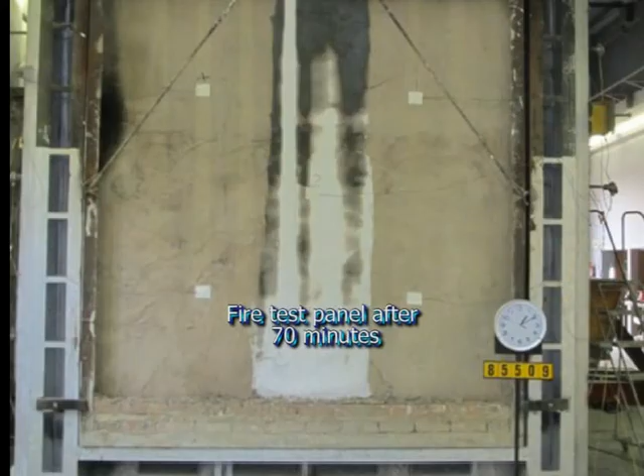Over several years, I arranged various tests to satisfy the requirements of the NHBRC, which are structural performance, impact test, chisel test, water penetration, condensation, thermal performance, durability, acoustics, and fire testing. The fire test done by the SABS doubled the required resistance of 30 minutes.

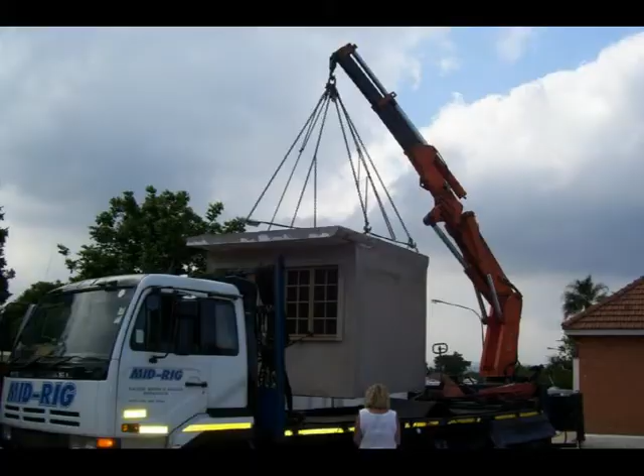Several years later, I used the system to construct an office for myself on our property. This was done at the builder's yard and transported by crane truck and erected on my site on a compacted platform. Polystyrene components which are extracted from the structural drawing onto an order form are manufactured and marked at the factory and delivered onto the site.

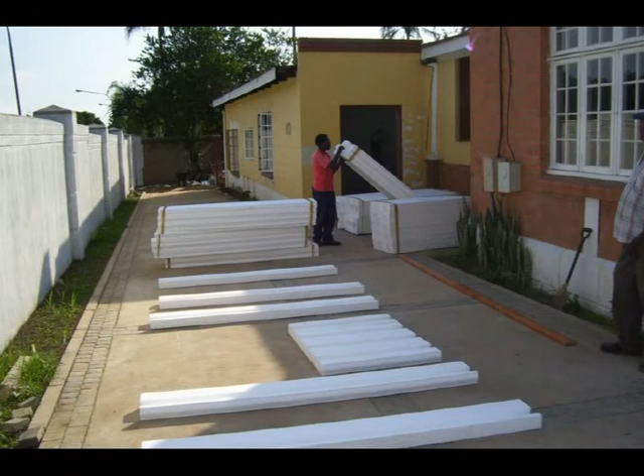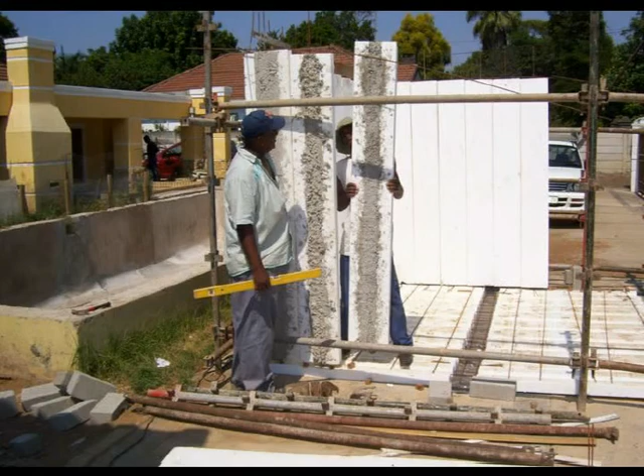The wall and roof panels are placed on a reasonably level area on site. Reinforcement is placed in the rib formers and the ribs are concreted. Wall panels are erected in sequence together with the door and window frames and are braced at the top. The internal and external faces of the wall are plastered with a ferro-cement mix.

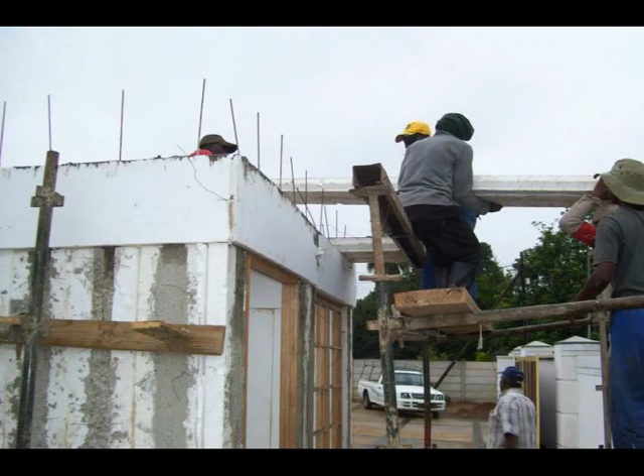Where a poly roof slab is specified, the roof panels are erected on a temporary support line. And polystyrene coping may be specified, which creates a feature and is also used as a stop end to the topping. The walls of polystructures can be of any shape on plan, allowing for architectural creativity. Low-income residential units can incorporate bunks accessed by a ladder for the children of a family by raising the ceiling, thus increasing occupancy at little extra cost.

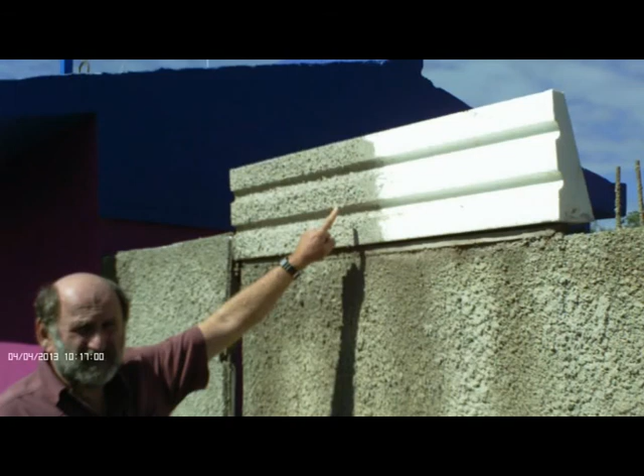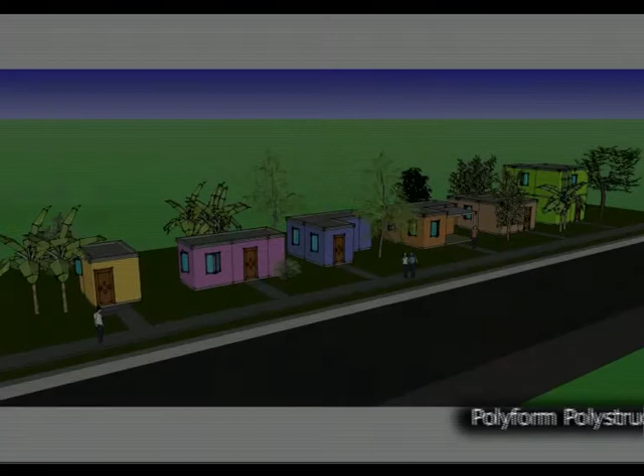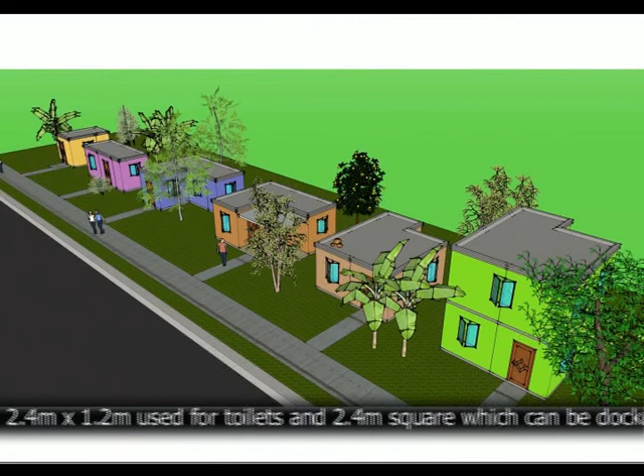By incorporating a deep polystyrene coping surrounding the poly roofs, these can be used for water storage, which is particularly useful in rural communities. The slab is specially waterproofed, and an outlet pipe with a tap provides water for washing or watering the garden. Where sheeted or tiled roofs are specified, wire ties are built into the top of the wall panels, which are fixed to the wall plates.

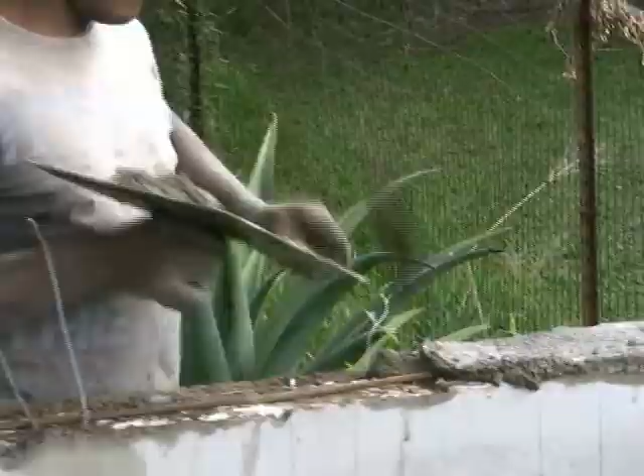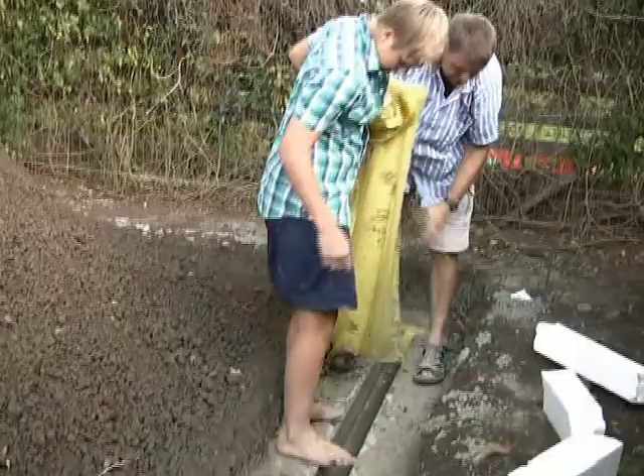On-site construction of polystructures uses smaller, conventional concrete footings into the top of which polystyrene slot formers are cast. These are removed and the bottom ends of the wall panels are placed vertically into the slots. Andy Hull of Polyform has done research into the comfort level of polystructures.

Research conducted into the thermal performance of polystructures revealed that a polystructure is able to insulate heat 40% better than a similar structure constructed out of M140 blocks with a steel sheeted roof. This results in far more comfortable living conditions which maintain warmth in winter and stay cool in summer. Further investigation revealed that in most cases, natural ventilation incorporating air bricks will be sufficient for typical smaller structures, thus removing the need for an air conditioner.

Polystructures not only satisfy the requirements of the NHBRC and are earthquake and storm resistant, but are also extremely cost effective. Hi Andy, tell me a bit about your business. Well, I'm a quantity surveyor, but my background has been largely with a contracting company. My experience has been more on a hands-on practical approach. I've done a fair amount of time with the professional offices as well, but largely contracting.

Now, what about our polystructures? How do our walls, the poly walls, compare with brick and block construction? Okay, what we did there was we took a scenario where we measured a particular structure. Firstly, we measured it as though it was a brick wall, a 230 brick wall, and then we measured the polystructure format.

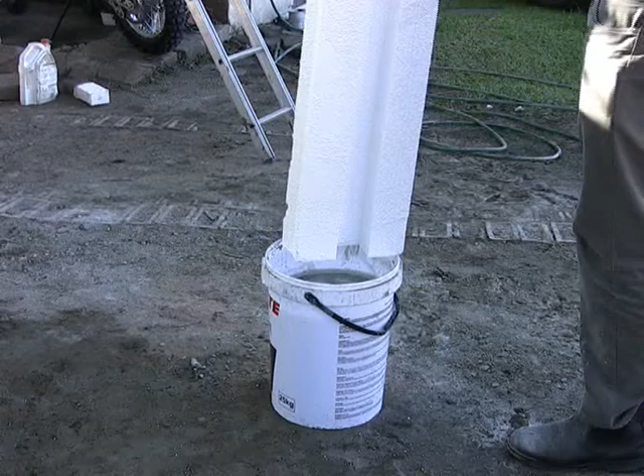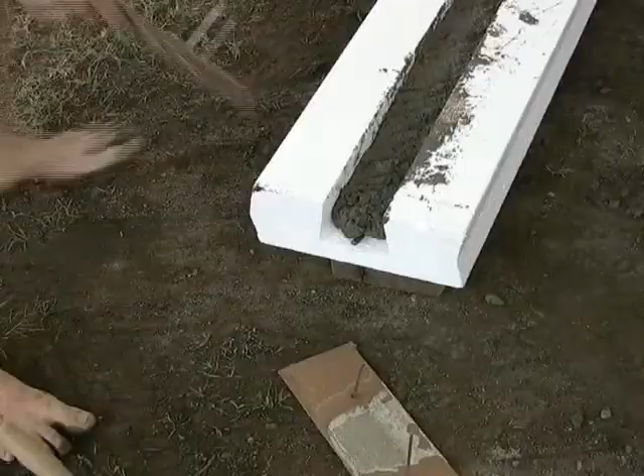Let me tell you a little secret. I'm not a handyman. Out of that have grown most of my inventions. I always look for methods and systems that are easy to construct, which can be done by unskilled workers. And yet in this simplicity is also cost effectiveness.

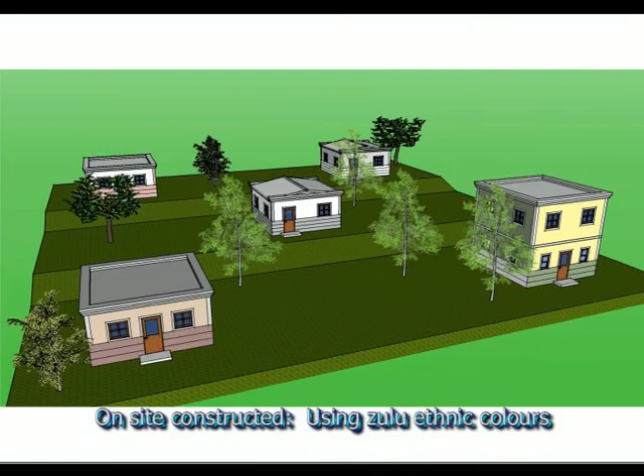An even more cost-effective housing system is the Poly A-frame. For internal partitions, Polyform offers an extremely simple, cost-effective and sound-resistant alternative to drywall partitioning. 500mm wide by 50mm thick recycled polystyrene panels are used, with 40mm gaps between them.

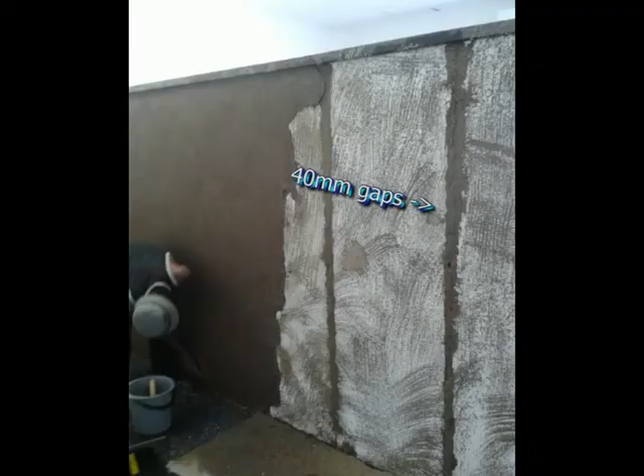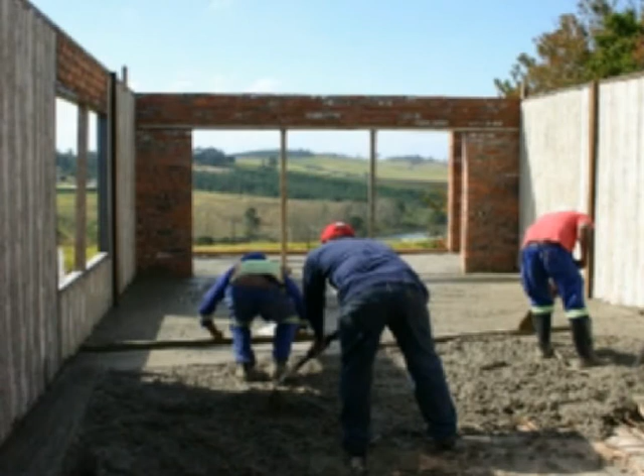The gaps are filled with 1 to 3 grout mix, and R8 rods are pushed into either side of the grout. For external walls to multi-story buildings, typical precast poly wall panels are used. The panels are designed to resist wind pressure and are bedded on epoxy grout to provide positive lateral support.

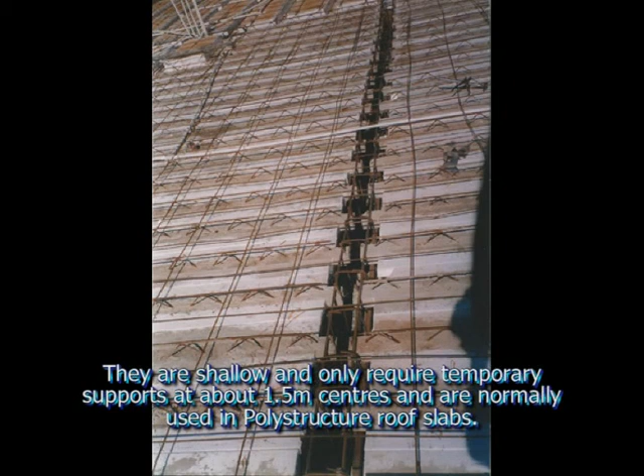Interestingly enough, the first building that we're using poly structures on in the in situ format is the house for the Canes. How did you first get involved with Polyform? In 1999 there was a devastating earthquake in Turkey in which over 30,000 people lost their lives. And we went together with Wolf Binder, the engineer, and we explored the whole devastating area, and we saw a number of buildings that had been affected.

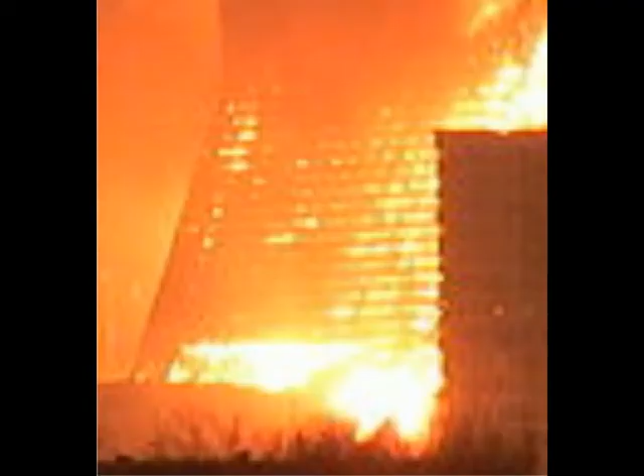There are some 50 countries which are earthquake prone, which includes Turkey and South Africa. Many more are also prone to other natural disasters like tornadoes, fires and cyclones, which cause massive destruction to lives and structures. The Multidisciplinary Center for Earthquake Engineering Research issued a paper substantiating that polystructures have 5 unique earthquake-resistant qualities.

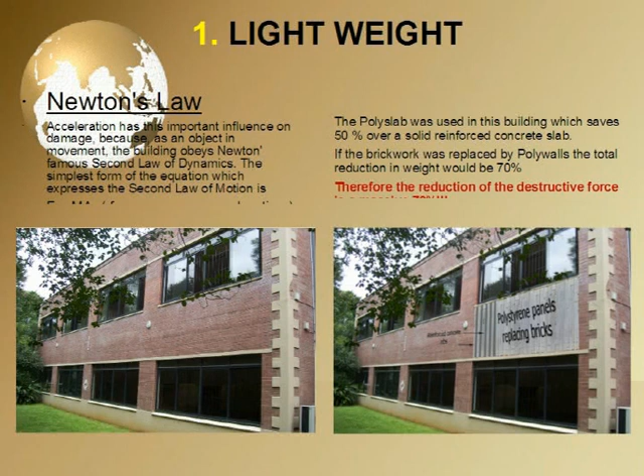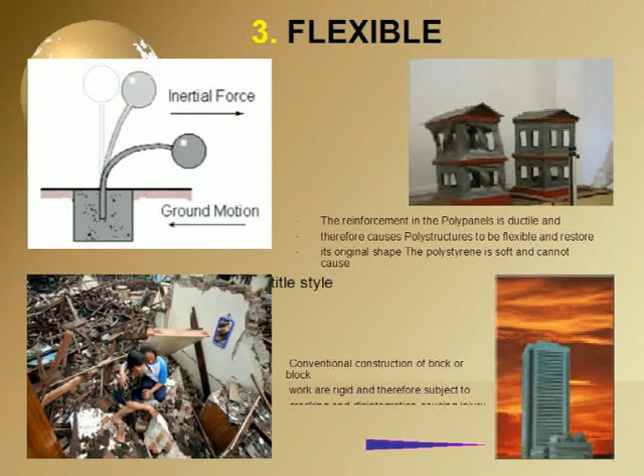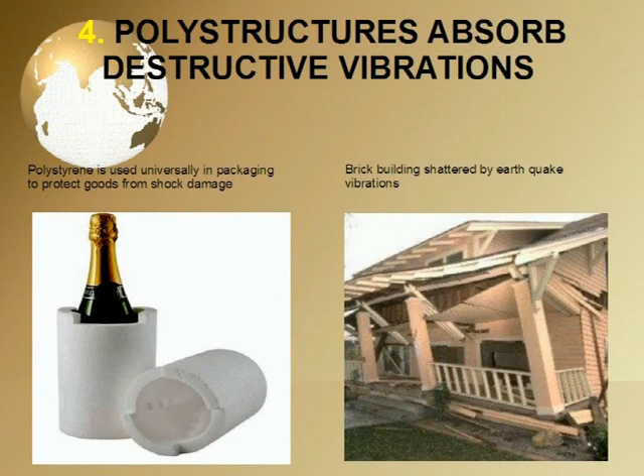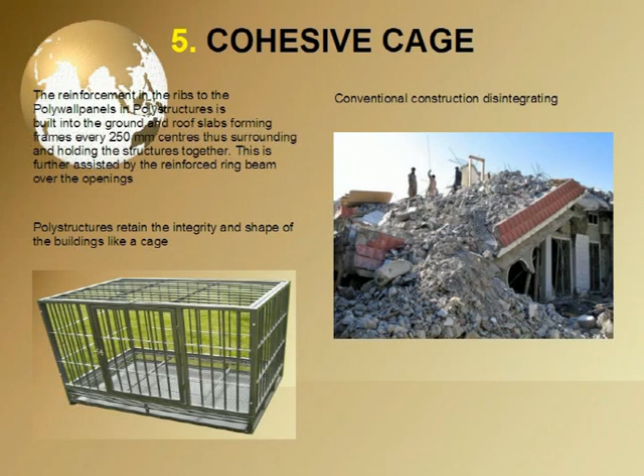Firstly, they are extremely lightweight, which reduces the destructive lateral forces and only requires shallow foundations which cause polystructures to ride over earthquakes. Because of reinforcement in the walls, they are flexible. Fourthly, the predominant use of polystyrene in polystructures absorbs destructive vibrations and provides shockproofing. Fifthly, the continuous reinforcement from the walls into the floor and roof slabs results in a cohesive cage holding the structures together.

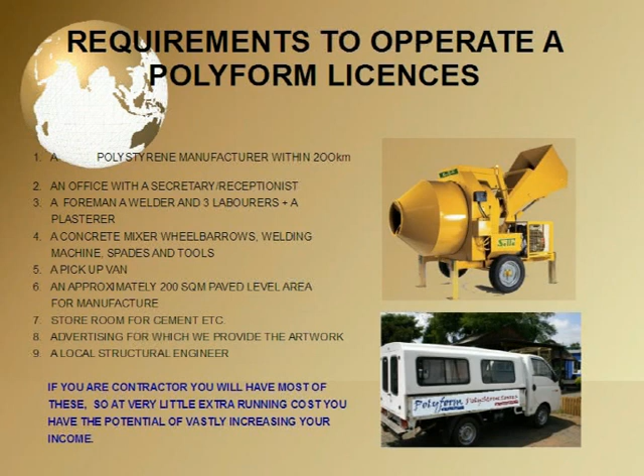You will probably want to know how you can make use of these incredible patented Polyform products or buy into the use of these systems. We offer lucrative licenses for exclusive territories in South Africa and elsewhere in the world for a once-off negotiated fee plus yearly support fees of 10% of the initial fee. This includes 3 days training with accommodation at our headquarters in Pietermaritzburg and ongoing technical support.

The international search for our PCT registration proves that the polystructure system has 54 uncontested novel steps. Until November 2014, we offer a Polyform operation in PCT member nations or blocks of nations by paying towards the patent registration and assist with the establishment of a Polyform office in their capital. This will provide technical and marketing support to licensees and secures the exclusive use of the products for the following 20 years.